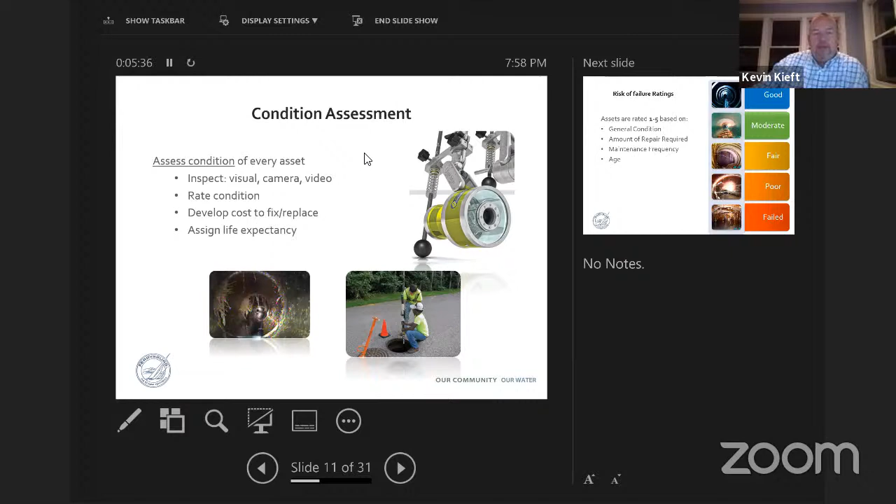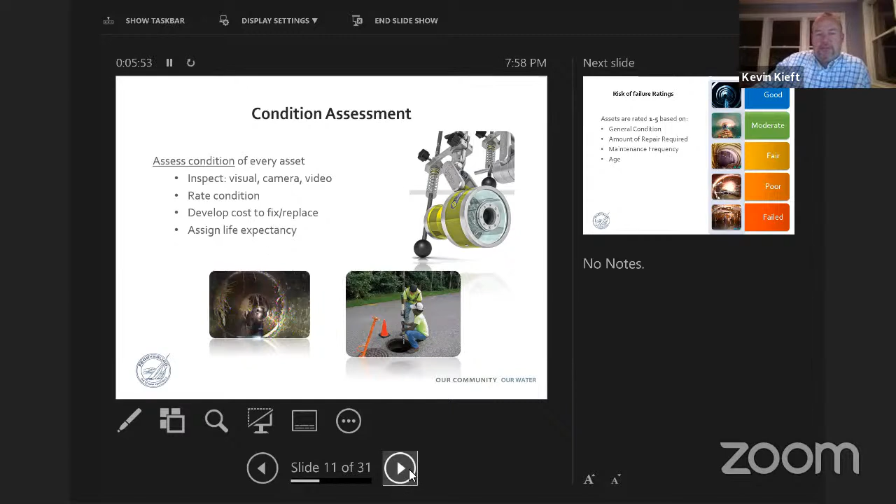So that was the first step, the inventory. Then we went into assessing the condition. We talked about plumbers being on site in certain areas. We also did zoom camera work on areas with pipe newer than 1993, to look down those and establish a condition assessment using a 1 through 5 rating, with 1 being good and 5 failed.

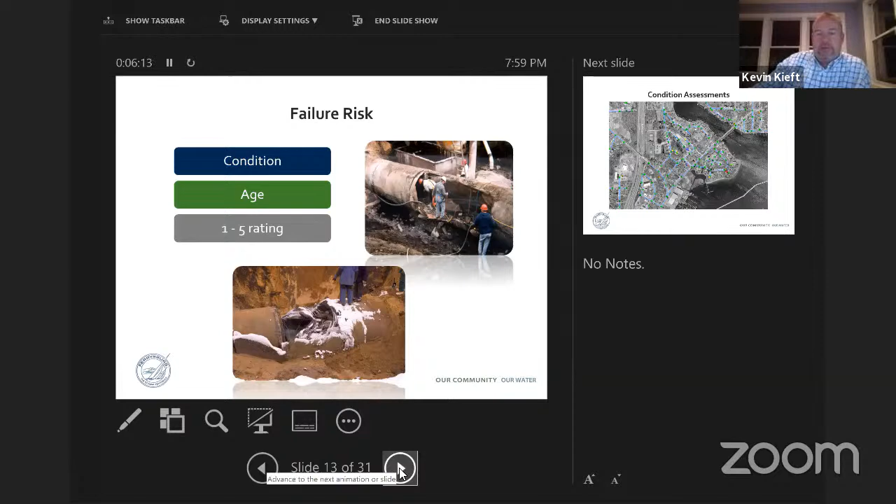And we did a risk failure assessment, because this is what we're trying to avoid, a catastrophe on a pipe. If we see any issues like that, Matt has gone through and fixed a few storm situations that we flagged as needing attention, and I think they also did a couple sanitary reviews. From that, we can map it all out.

Plumbers' videos are uploaded into the GIS, so they're linked to each pipe and can be looked at in the future. If there's consideration of, let's see what this pipe looks like in 3-4 years, we can see if it deteriorates or stays the same. So a lot of good information for that, and as part of the condition assessment.

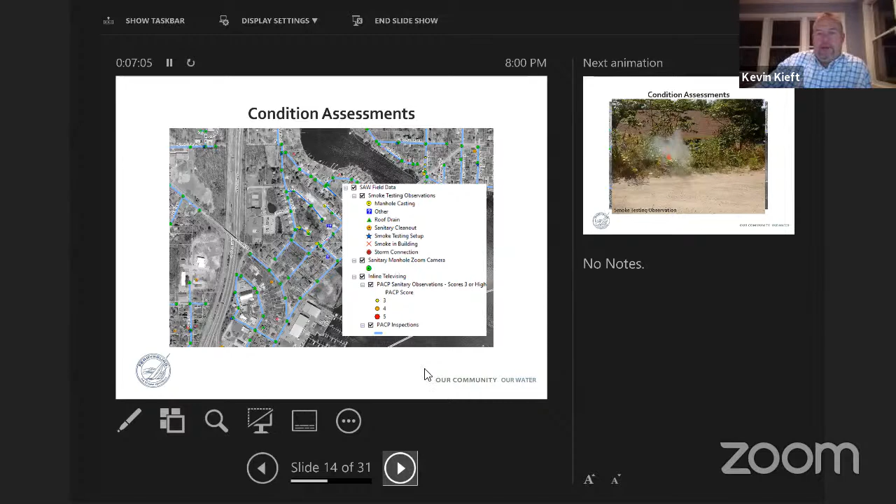This is smoke testing that crews have been doing. Here's an example of smoke coming through a manhole in a front yard. Different types were mapped out with roof drains, cleanouts, smoke in the building, or a storm connection. Those are all provided on a map and in a report that Matt has. Here's a couple other examples of smoke testing.

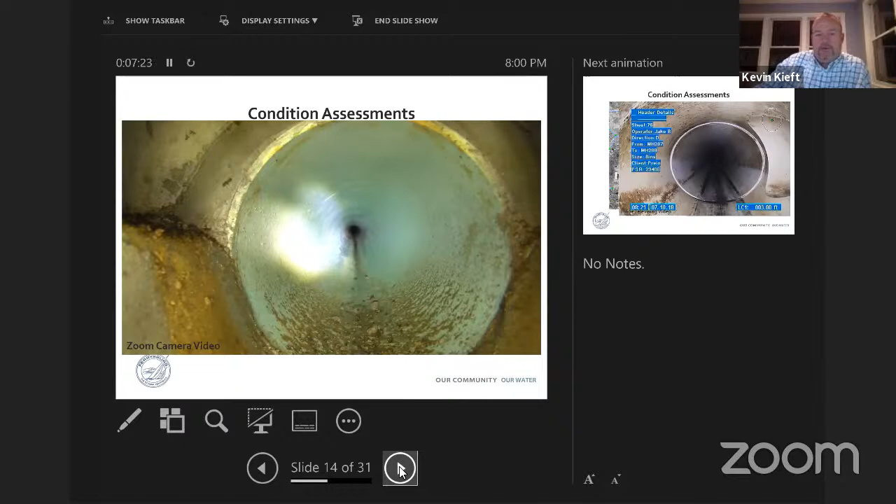This is a zoom camera video where we put it down in one of the new pipes, just to get an idea what the first 30-40 feet look like in a pipe, to get a good feel for what the remainder is. Here's an example of the televising that was done, and a summary of the smoke testing.

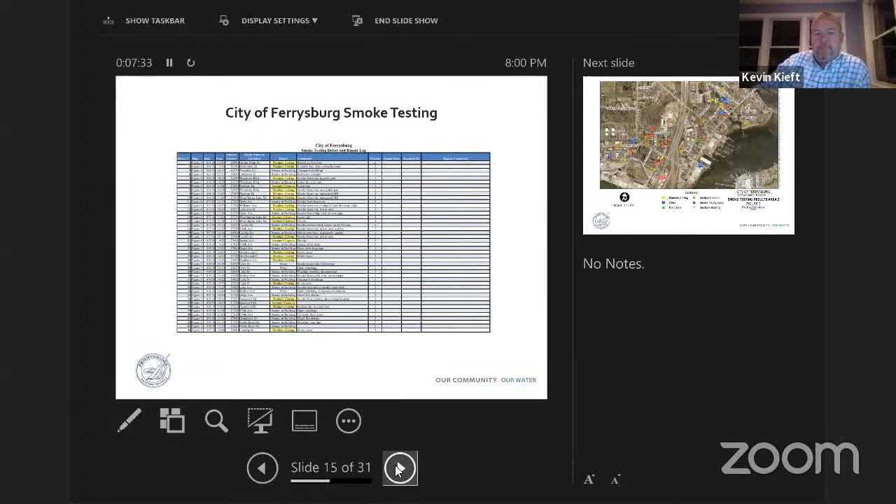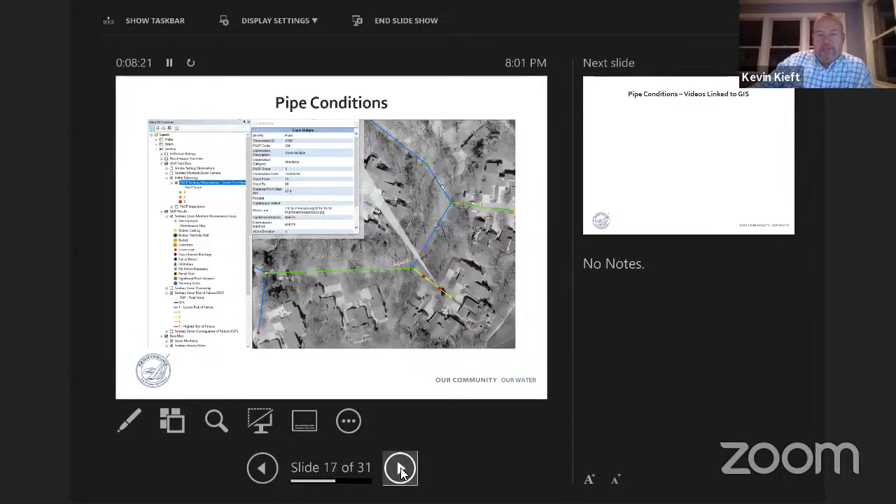But there's some manhole castings, some with wrong covers, storm cleanout or storm covers on them with holes in them. If those are in low areas, they can be fixed to account for some of that infiltration. Some more examples of condition assessments with the pipes linked to the GIS—here's an example of a cracked pipe, tied right into the GIS.

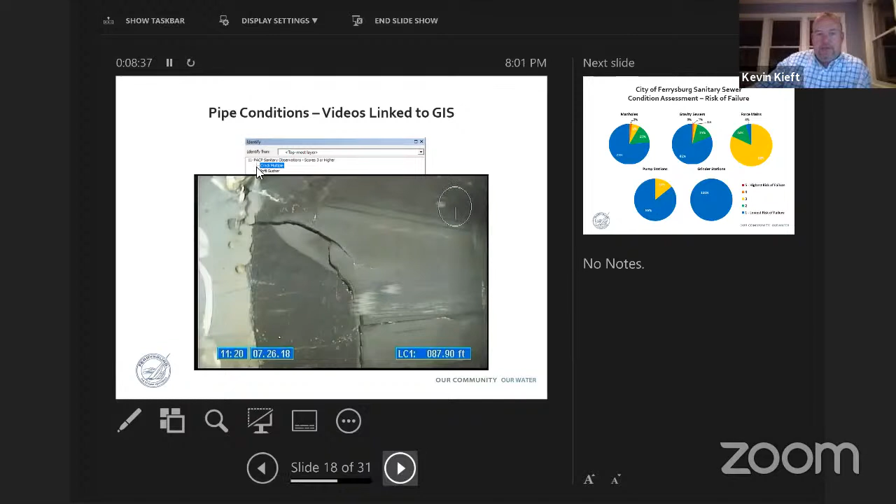I wanted to go over this for the City of Ferrysburg, the sanitary sewer condition assessments, and the risk of failure that we've established. Looking at the blues, those are the good colors you want to see. Looking at manholes, gravity sewers, grinder stations, pump stations—those are the majority, those are in good shape.

The force mains are assessed mainly based on age, with the sanitary system installed back in the late 70s, early 80s. Those are more difficult to assess because they always have flow in them and are under pressure. So we did an age assessment on those—typical lifespan of 75 years, they're about halfway through their anticipated life. Overall, a pretty good situation with the sanitary.

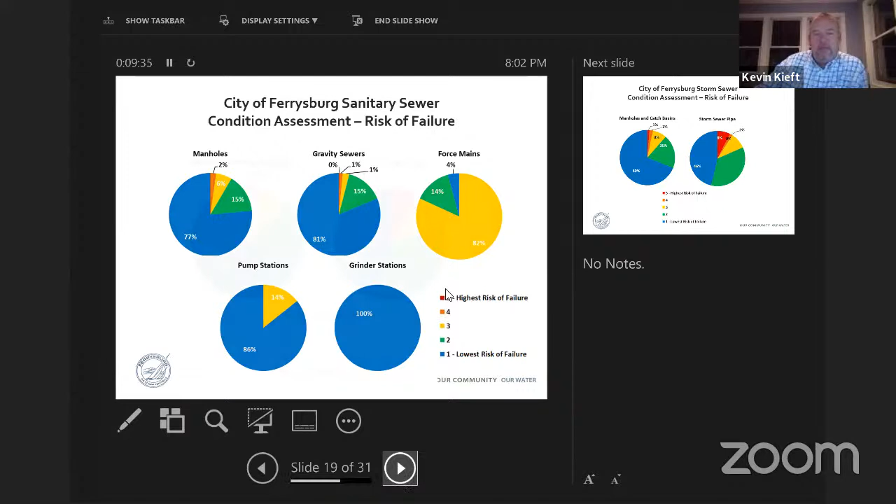And this is the storm system. You'll see a little more concern in the storm area, with more reds, oranges, and yellows. Definitely an older system on the storm side of things, but those repairs typically can be done with street improvements and are less costly than the sanitary, which is usually a deeper system to repair.

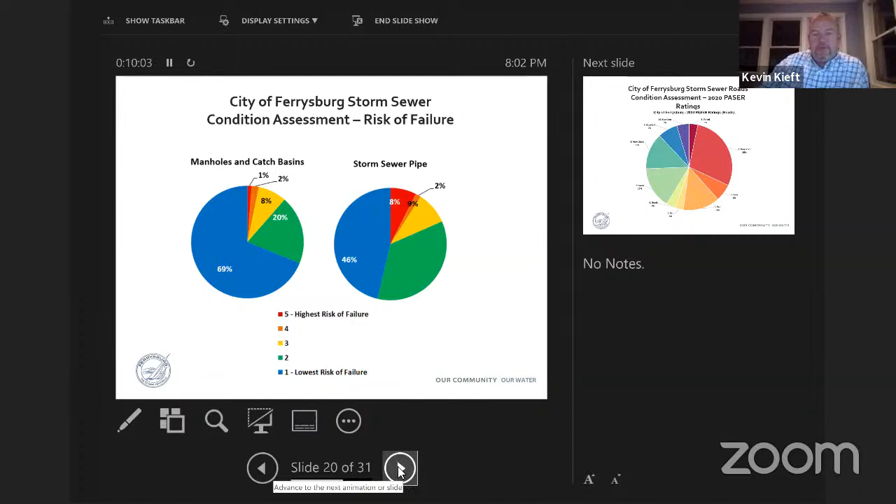Also, as we went through, we did a review of the road system. The MDOT and state PASER ratings use a scale where a 1 is failed and it goes up to 10. You can see the road side of things is an area of concern for the city, with just over 50% in the failed to fair-poor condition assessments that were done.

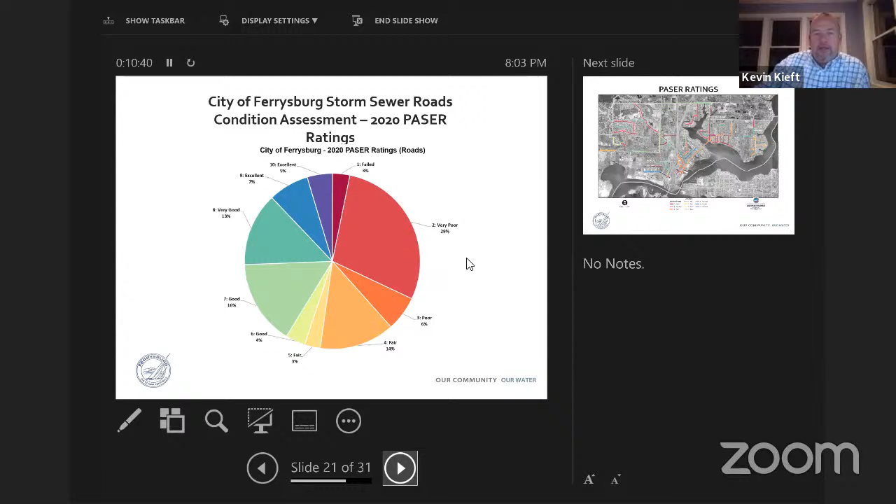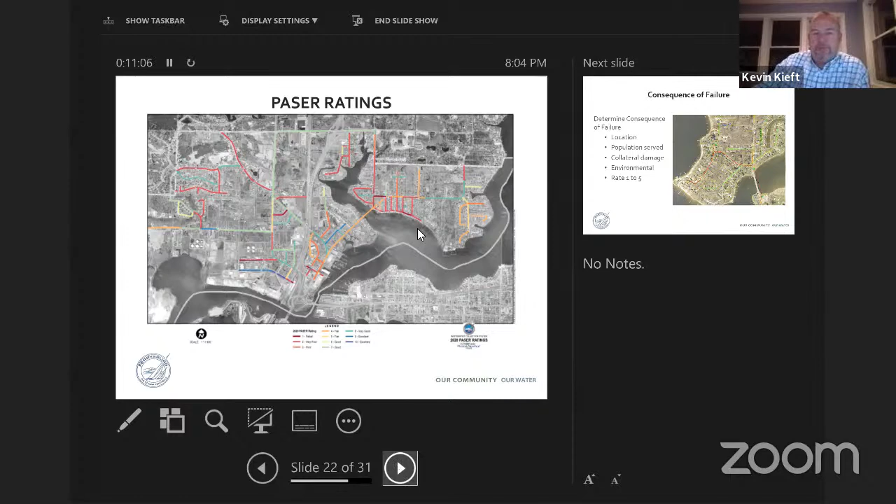We were able to map those ratings. So from these, we can start making defined decisions—for example, we may have a sanitary issue on 168th, a road in poor condition, and some storm issues. When these are all overlaid, that's how we produce our capital improvement plan, which we went through with Matt, Debbie, and Craig.

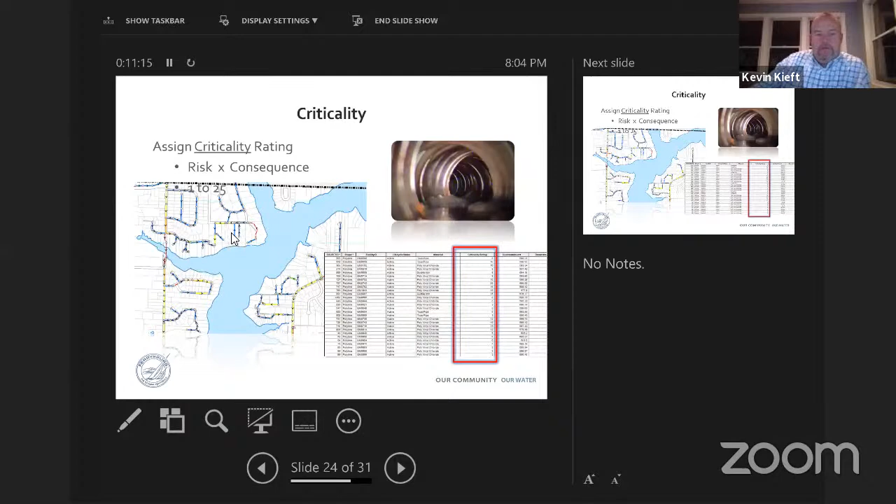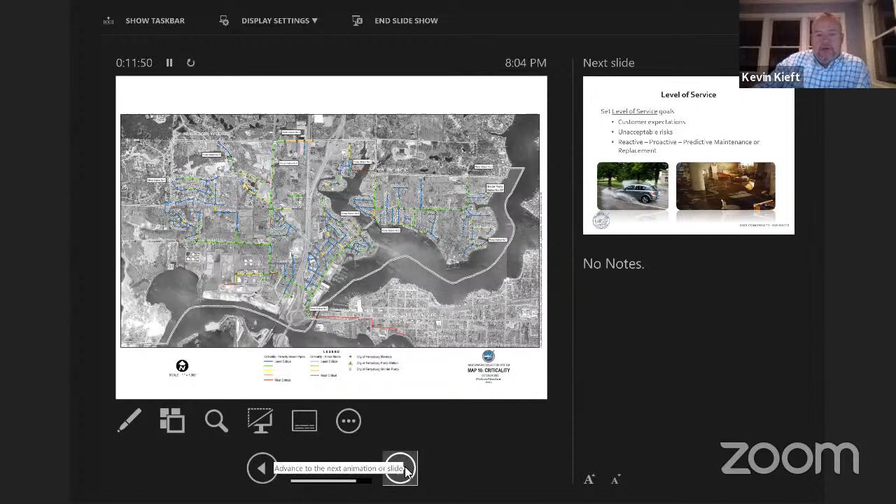Just a few examples of some of the criticalities—I'll skip through those. We established a map of the criticality of the system, looking at the risk of failure and the consequence of failure, like on these larger roads: North Shore, 178th, the main streets, 3rd Street—that's where your biggest traffic is, and you'd have the most issues if you had any problems. So we factor that into our discussions and mapping too.

Then we go through and look at what kind of level of service we anticipate. Like most communities, they don't want to get to the point where they have flooded basements, and they are definitely more proactive and looking to replace the improvement side of things.

Sounds like I may be running into some internet connection issues. Can you still hear me?

Yes, okay. For the asset management plan, we put together a report along with a sanitary capacity analysis. You'll have those as deliverables, plus the financial rate management plan, which Andy has prepared. The smoke testing report has already been delivered to Matt, and he's working his way through some of those items.

So with all that information that we've gathered, we went through and completed a capital improvement plan. We went through this with Matt, Craig, and Debbie and adjusted some projects based on budgets.

Here on the left is an example of where the different categories are for the funding side of things. The blue is the sanitary sewer, with different projects in 2021, 22, and down the road. A little higher in the storm category, which is green.